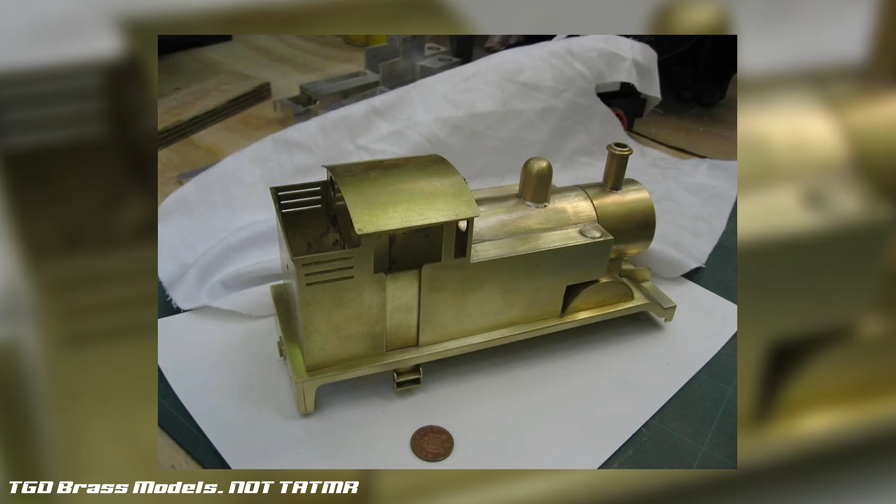I'd never done this before. All my models had been 3D printed beforehand, so I never really knew how to work with brass. And I wanted this video to be special, so I wasn't gonna just do what I normally do. Since the moment I found out that Thomas's brass model was made of brass, I wanted to be able to replicate something just like it. It became my mission to achieve complete brassiness.

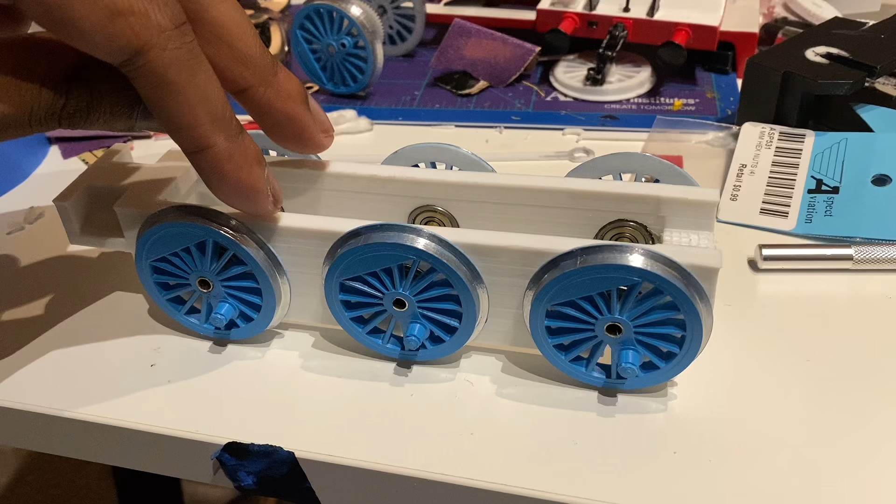But of course I couldn't jump straight into it. I had to get myself familiar with Gauge 1 model making and understanding basics before I could jump into a project so ambitious. So I wasn't gonna rest until I knew exactly what I had to do to make this model happen. Over the course of 2 years and 38 Thomas models, and talking to a ton of people, learning the ins and outs of Gauge 1 modeling, I was able to come up with a pretty decent idea of what I had to do.

Now, this wasn't gonna be easy, nor was it gonna be any form of fast project or something that was gonna be done within the matter of weeks. As I said before, this model took a lot of planning and a lot of just overall brainstorming before I could bring anything into the physical realm and start mangling brass with my bare hands.

Every time I made a Thomas model, every time I improved on something that I did with my original model, and every time I made somebody else's model, I learned more and more things of what I had to do and what not to do when making this model. I had to understand the ins and outs, exactly what to do before I could move on to anything physical.

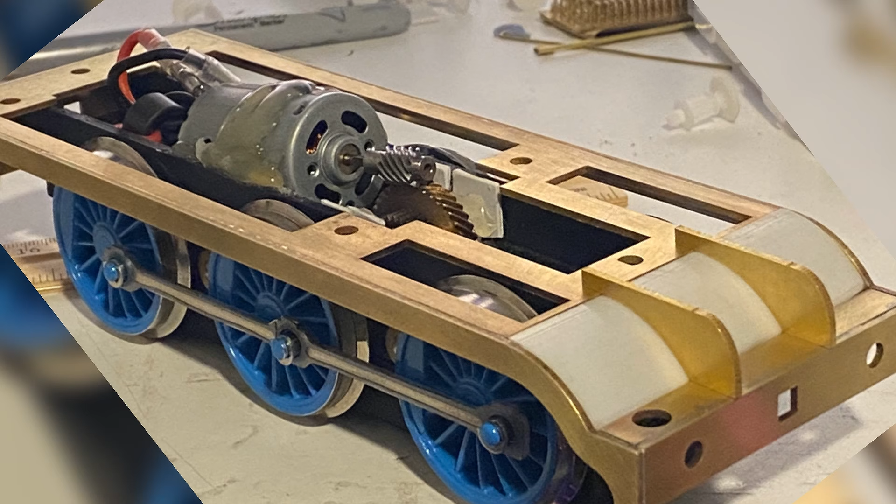So I immediately moved on to the body. The body was, I would say, as equally as difficult as the running board, but it was still an easy task now that I knew what to do specifically. So I started with the side walls and the top of the tanks. During this time, I was also experimenting with smaller brass parts and soldering things together.

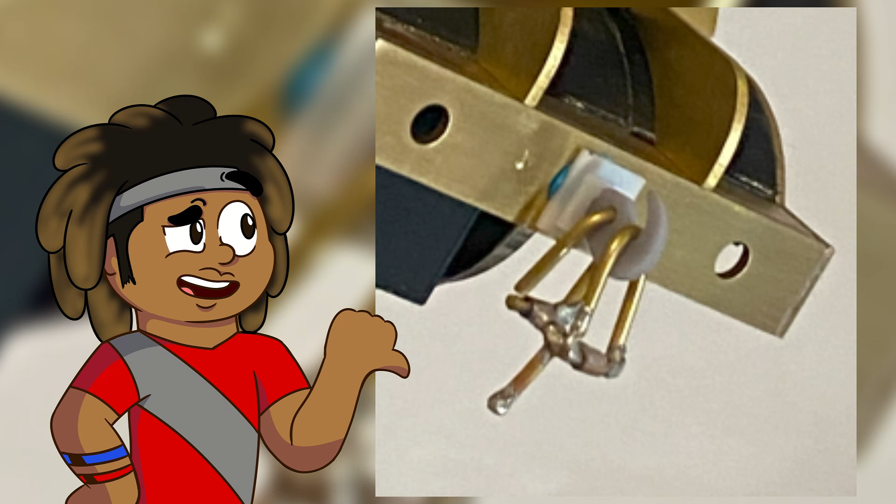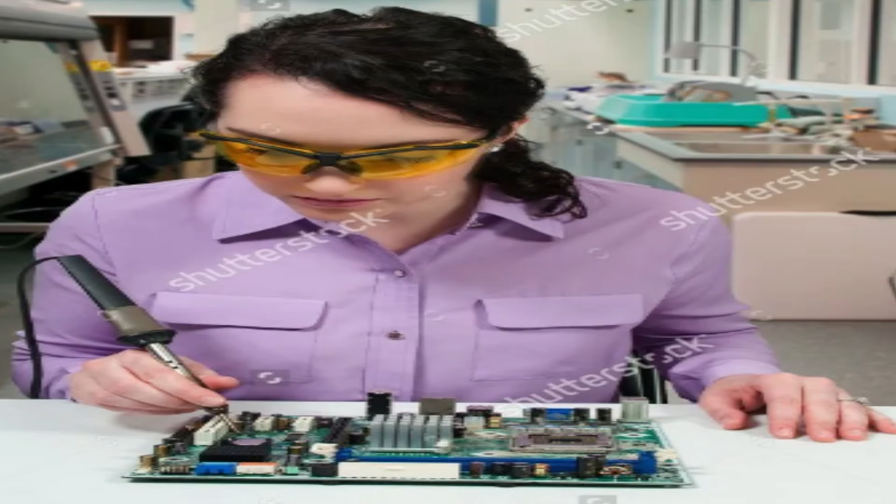I wasn't too sure of exactly where to get Thomas's era coupling hooks from, because I had no idea what they were. I also saw Noah make some scratch-built coupling hooks for his salty replica, so I was like, hell, I can do that too. So I ran down to Hobby Lobby, grabbed a couple of brass rods, went back home, sat down, whipped out the soldering iron, and got to work. In no time, I had some semi-decent looking scratch-built screw-link couplings.

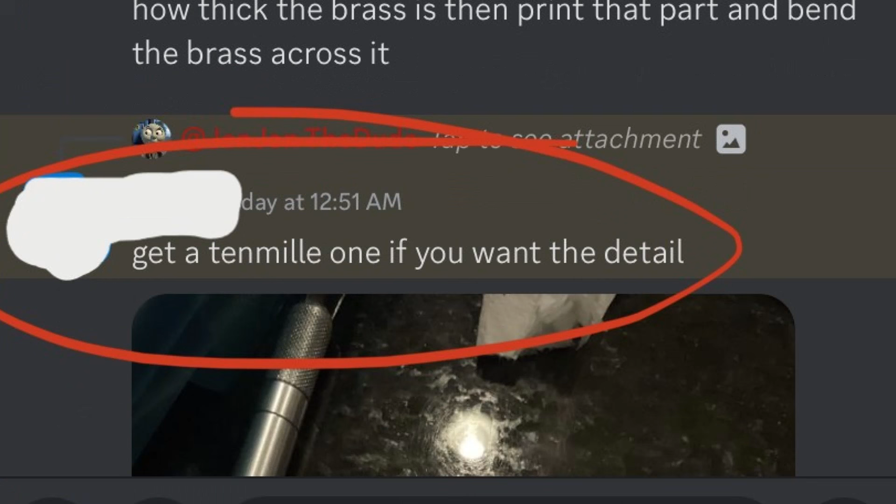After I made the first set, I let the guys know exactly what I was up to, and they didn't approve. They graciously pointed out that the original couplings were Tenmille couplings, which, admittedly, I guess I had to go for the accuracy, so I buckled down, accepted the cyberbullying once more, and got myself two Tenmille screw-link couplings. They were not having it, man. I tried to make handmade couplings because I didn't know about Tenmille ones, and I tried my best. They looked the part. Yeah, whatever.

Who cares about the couplings right now? I'm still in the process of building the body. Let's fast track a little bit here, but I managed to figure out the body and have the main parts soldered together. I had the top of the tanks and the back soldered to both sides of the body, but I didn't have the cab.

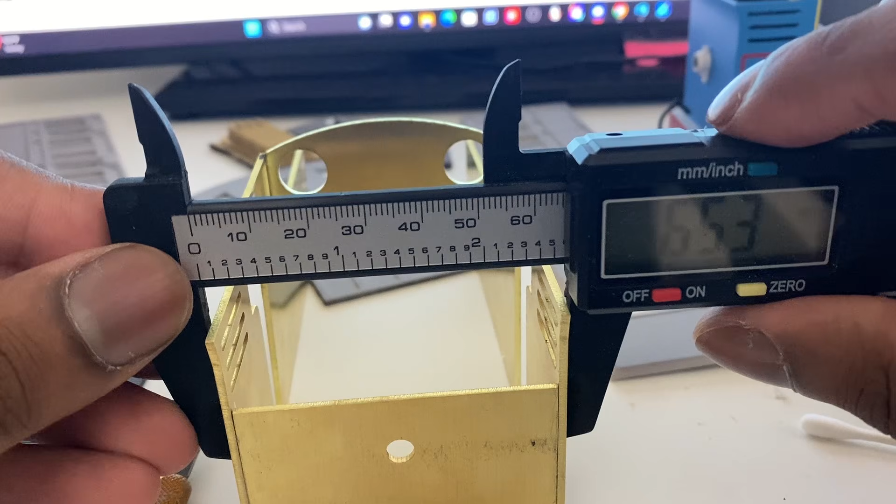Whatever, we can fix this. But I'd have to do that. In the meantime, while I tried to mentally figure out how to fix this issue, I decided to move on because there was absolutely no time to hang around.

So I decided to bust out some of the brass I had and hand cut myself a brass roof. I used brass shears, a PVC pipe, some heat, manhandling gloves, and a heck of a whole lot of pressure.

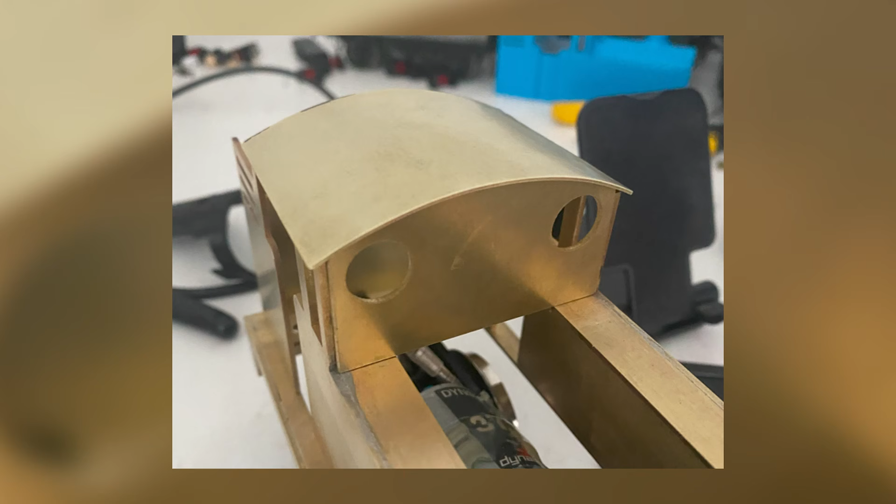Eventually, with some filing around the edges and proper shaping and lining up, I managed to make a brass roof. I understand this is just a curved piece of brass rectangle, but after having to resolder, cut down, chip off, and almost dropping stuff, making the brass roof really gave back hope and the drive forward I needed to get this project done.

Then I used my newly found skills of hand cutting brass and filing it down to make Thomas's brass neck. After that, I used brass tubes of the appropriate size for the dome and funnel. But nothing I had was the right shape for the brass funnel tops and domes, so I just used resin for the time being. I was pretty much fine with this.

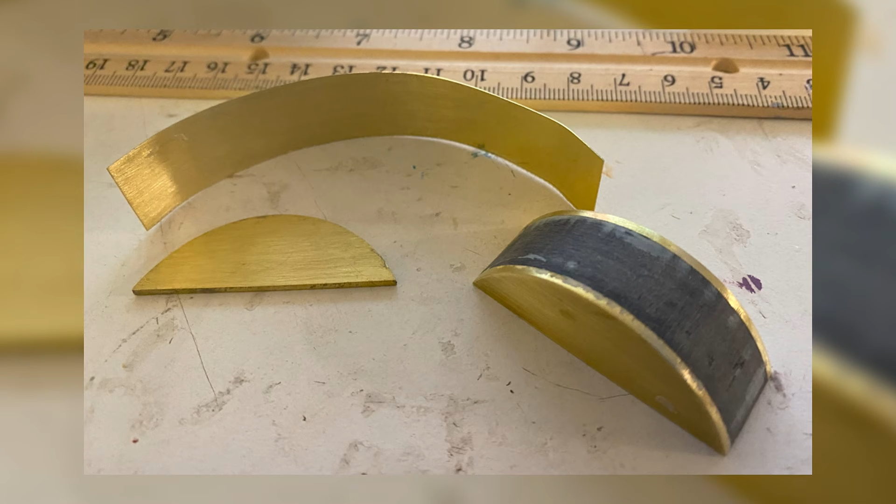I cut more strips of brass for the brass splashers, and those were done. I even gave them little labels. Yeah, they're the same on each side, but I like to have them labeled for some reason. Don't judge me! At this point, Thomas was around 70% brass. I couldn't have been more proud of myself.

I pretty much came to a standstill when it came to Thomas's overall build. I also didn't know how to give him a brass boiler. Then Noah came out from the clouds once more and showed me a site to get this brass boiler, so I did.

It arrived and I immediately got to measuring and cutting and cutting and measuring. Thomas's smoke box, boiler, and running board curve are all made of the same diameter brass tube, so I was able to cut this up into miniature pieces and get things stuck together in no time. The running board was officially the first part of Thomas to be fully made of brass.

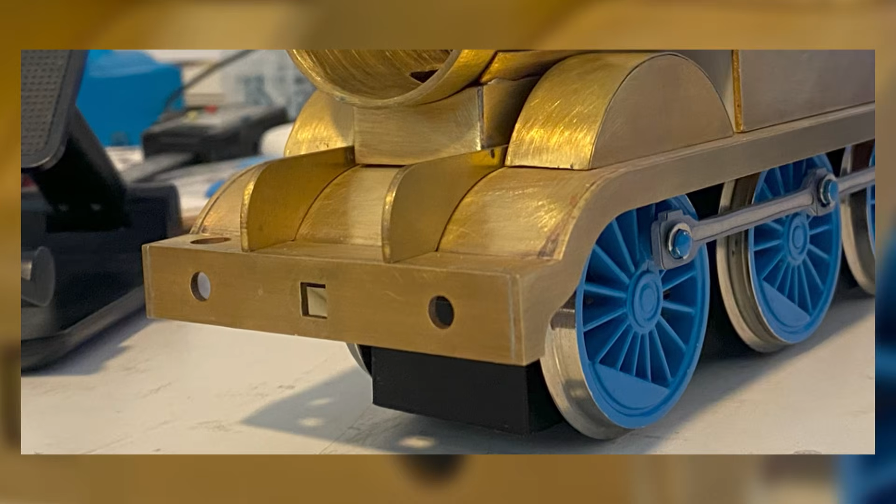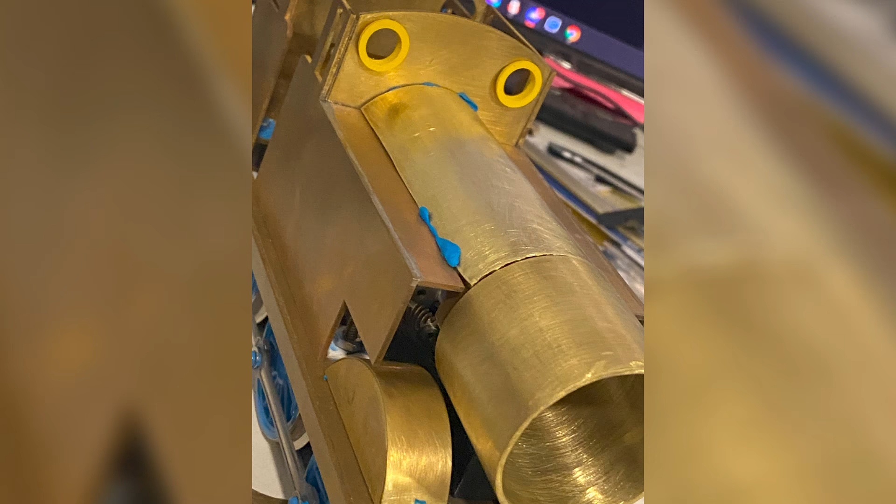After I had the piece of the running board cut and soldered down to have that nice, delicious looking curve, it goes without saying that Tuffy was pretty excited. After test fitting this thing, it was time to really get into action. I had to solder this thing down now.

But before I did, my good buddy Jamos told me about some of the most wonderful tools in the world: helping hands. Helping hands are a pair of clamps, I don't know what metal they're made of, but they're able to position themselves in any way I see fit and hold the hot metal while I solder. At this time I had a smaller torch, so I had a more controlled flame, and this really changed the game.

I then used this to hold the boiler and the cab fronts, getting everything soldered down. This made soldering smaller parts so much easier. The front end of his cabs were pretty much a one-and-done scenario, but then I had to buckle down and do some of the hardest parts I've ever done, such as his bunker curve.

I knew that bending this piece of brass with my bare hands and a couple of pliers wasn't going to do the job, so I asked people, hey, how am I supposed to bend a 0.8mm thick piece of brass? They introduced me to one of the most beautiful tools I've ever used: a vise. A vise allowed me to put the piece of brass I needed and bend it to shape accordingly. It was absolutely a game changer.

So with the power of my vise, my pure man strength, and the helping hands, I was able to make the curve of the brass bunker and solder it into place. Thomas's brass parts were almost fully put together, but the only problem was the dome and the funnel. At this time, Thomas still didn't have his funnel and dome knocked into place.

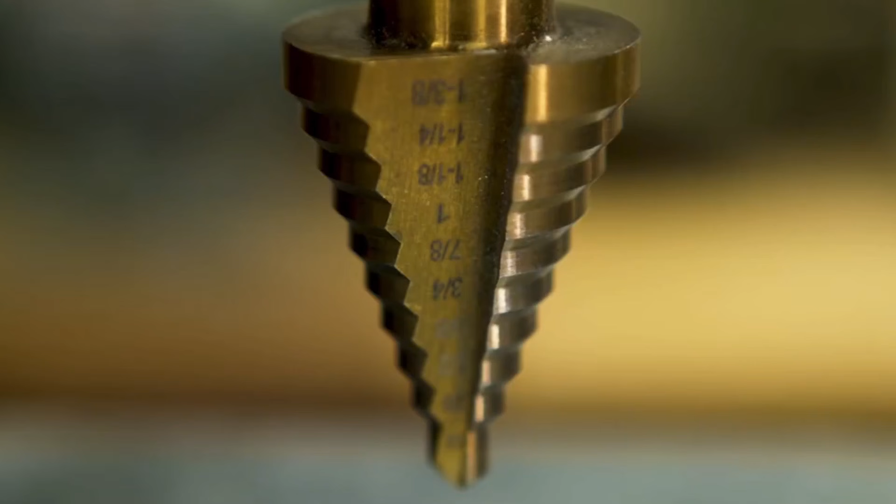I didn't want to limit myself just in case I wanted to add a smoke mechanism to Thomas, so I had to drill a hole into the top part of his smoke box. A step drill allows me to drill into the brass at smaller intervals and eventually get to the diameter size I was hoping to achieve.

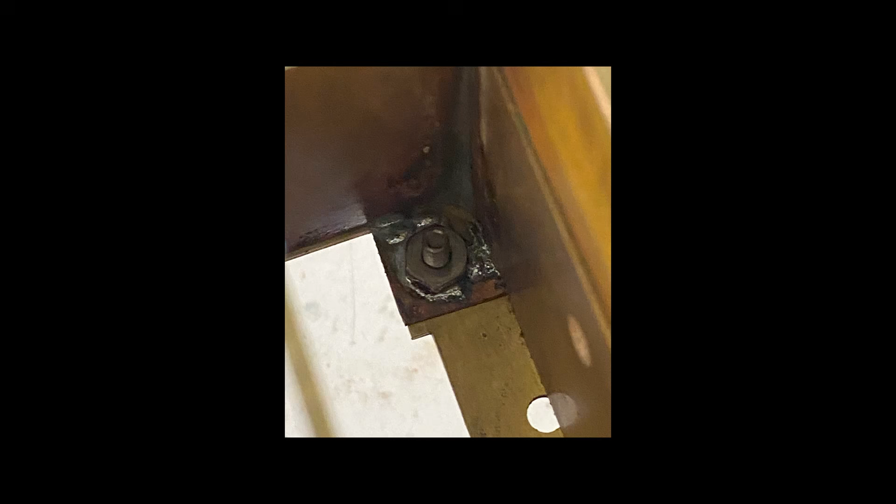After billions more attempts of soldering down his dome and funnel, I managed to get them even and at the right heights. In the meantime, I also soldered down some ways to screw Thomas down to his body on the running board, and we're not going to talk about that part.

I only did 2 of them. Come on, listen, soldering down these screws, it was hard work, okay? I only had time to do 2 because they kept moving, they kept sliding, I couldn't really see inside the body. Come on, you would have done the exact same thing. You would have done the exact same thing!

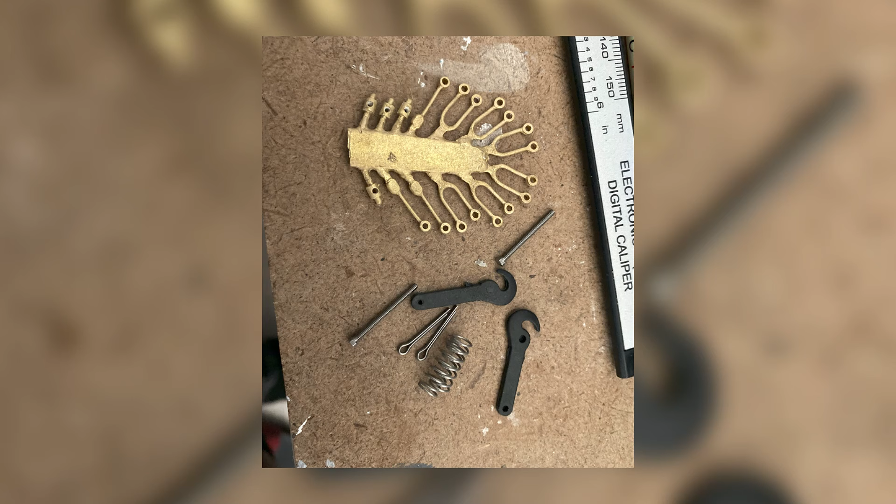Later along down the line, Thomas's Tenmille couplings arrived, and I couldn't wait to put these bad boys together. But my only issue was, I didn't know how. The only other person I've known to put together Tenmille couplings was Thomas Tank Merch, and they told me I had to use something called a metric tap. And of course, the one I needed was so small that the local hardware stores weren't going to have something like that in supply.

So, to make a long story short, I ended up using a little hand drill to open up the parts that are supposed to go together, and I used an X-Acto knife to open up the hook, slip the brass parts in, and close it back up with some super glue. And we've got accuracy on 100, baby!

I forgot to mention this earlier, but I ended up spending a very embarrassing amount of money on brass domes and funnel tops for Thomas instead of using the resin ones you've seen in the images prior, because, again, cyberbullying and peer pressure has taken full effect on the mind, and I've had to succumb to the pressure.

After consulting with a few people, I realized that the brass Thomas, the original model that I'm trying to replicate here, had his smoke box soldered down to the running board, and accuracy as goes is accuracy as goes. I decided to do the same.

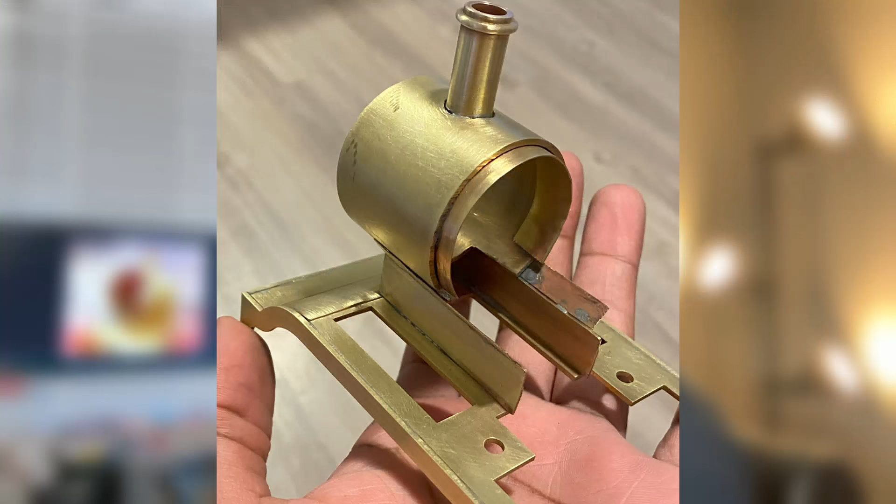At this moment in time, Thomas's body, everything was perfectly put together and made of brass. This was crazy. I was holding a brass Thomas replica in my hands, made by me specifically. This was the greatest feeling I've had for a while. He was cleaned off, he was shiny, he was ready for his little extra bits right before the filling and priming, and it's like nothing could go wrong.

Oh yeah, the chassis. Oh my god, how could I have forgotten about my favorite part of this whole thing...

The process of making the chassis is a battle that I'm still currently fighting today. I feel like there won't be a solid update until way later. But I'm just going to show you and tell you basically what I had to go through.

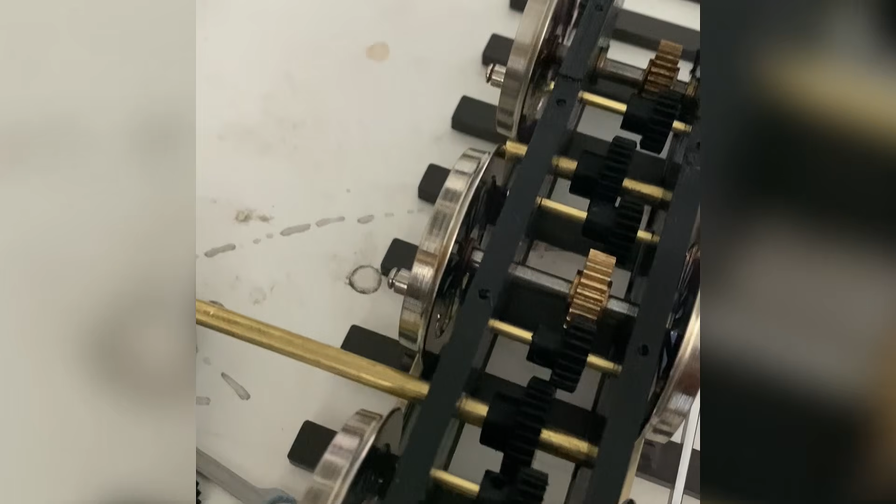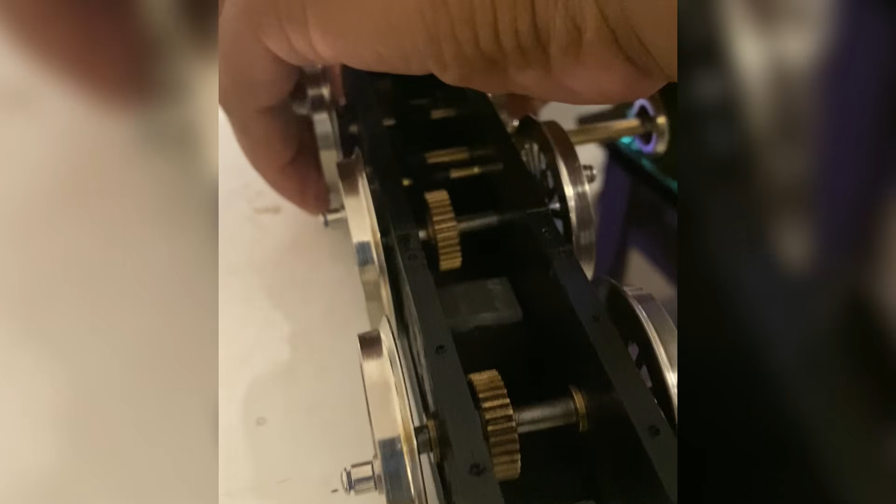The original chassis was a prototype chassis that I built using Jamos's recently constructed CAD files, and this chassis was fully bricked up. This chassis was fully geared up, which did prove to show me a bit of difficulty and really challenged my expertise when it comes to motorizing chassis, and I hate them so much.

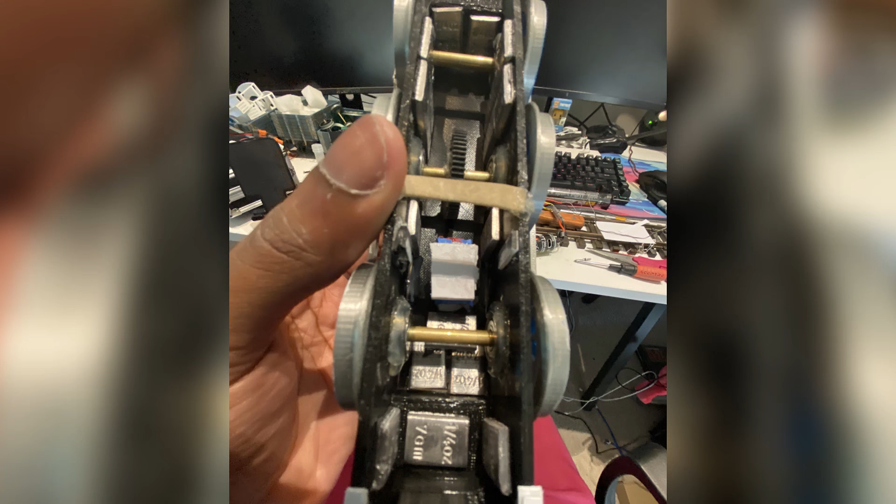I've made 3D printed chassis in the past, and as far as I'm aware, they didn't really turn out that well. They were fragile and shattered pretty much the moment they started moving, but that was way before I knew anything about anything. Seeing Jamos achieve something so great with the chassis she printed for herself, I thought I could do the same.

But my god, was I wrong. I didn't know the next thing when it came to fully geared chassis, much less gear ratios and how they all work. The chassis I 3D printed for myself was too stiff at one point, the gears kept locking up, it didn't roll as freely as Jamos's. I thought that maybe the gears needed a little guidance with some oil, and that didn't work. But after some consulting, I did manage to make the chassis run a little smoother.

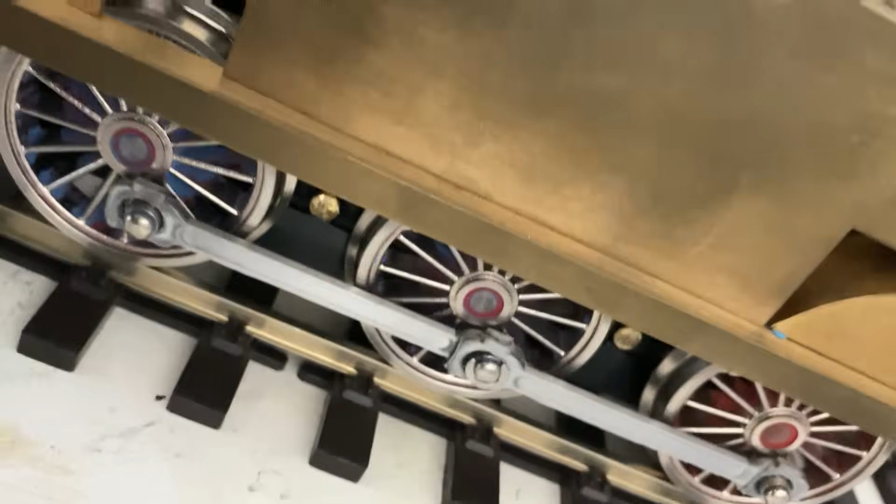It's really late, but like, oh my god. It fucking worked. It fucking worked. Oh my god, it's so good.

The next step was having the motor mounted to the chassis the proper way. Using reference pictures of Stanley's spare chassis owned by Tom's Props, I had the idea to make my chassis pretty much the same as that. That's also when I realized that I have no idea what the hell I'm doing.

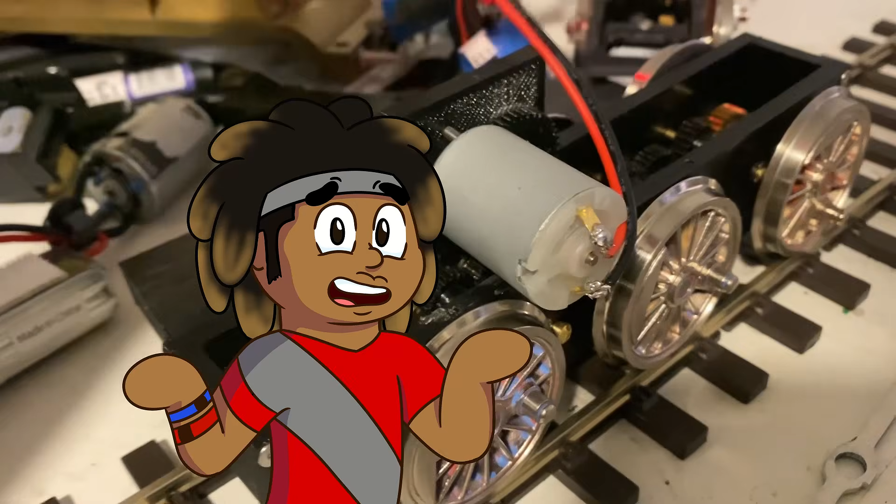So for the time being, I had to scrap that idea and go for the good old classic worm drive. The worm-driven chassis seemed to be the most reliable and the most dependable, but this is exactly what I had to do. I was really excited to have this thing going, but something felt off. Something felt weird about having a 3D printed chassis block and gears alongside a solid brass model of Thomas.

That's when my good friend Goodwin came down from above and slammed this massive chassis block down on my desk from thousands of miles away. I couldn't have been more excited to get this bad boy underneath the Thomas body and get this thing rolling.

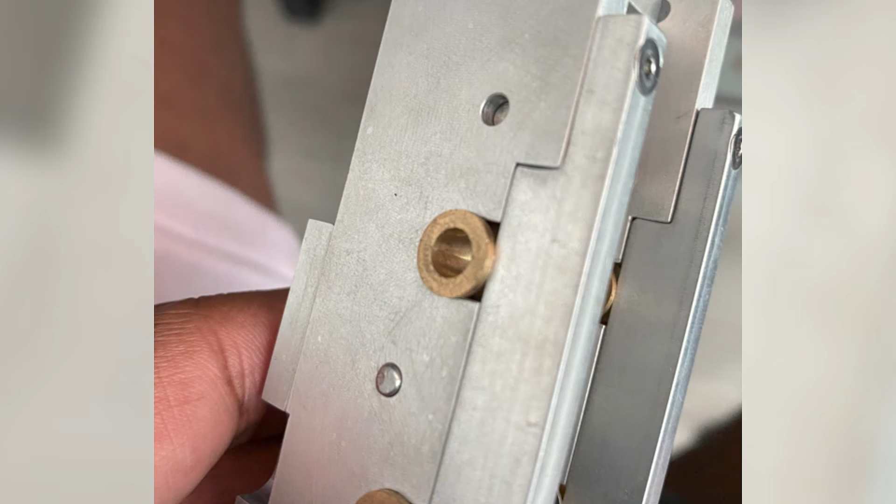I had to take one of the Markland wheels that I had and pop off the wheels on both ends, put on some bearings, and fit it to the chassis. And might I tell you, this chassis ran like a dream. Well, not ran, it was really smooth when you pushed it, because I haven't figured out the motor situation, but we'll get to that.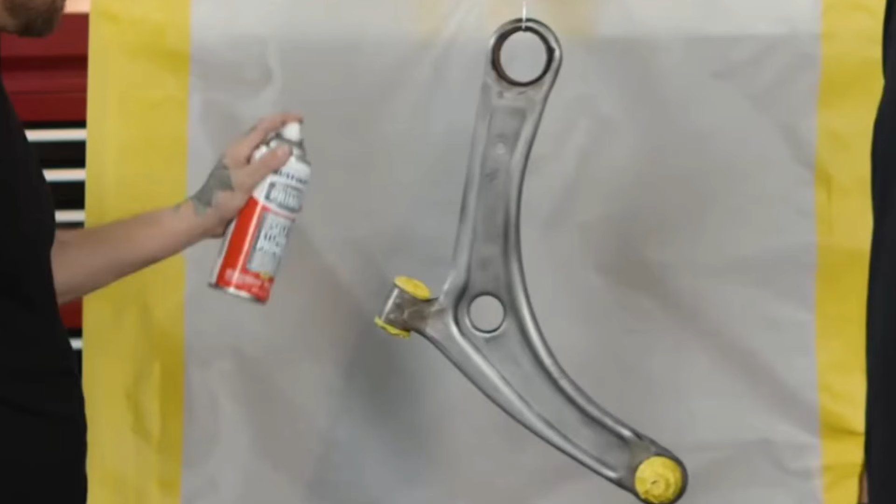Since Thomas is completely made of metal, I had to use something called etching primer. It's basically a primer that allows paint to stick to metal without it flaking off over time. After Thomas was in his military green, I then gave him a pink primer.

After Thomas got his pink primer, the process was gonna be as simple as it comes, you know? A good old-fashioned TS23 and TS10 and call it a day. And that's what I did. Thomas was given the good old 1-2-1-2 and painted blue before I even knew.

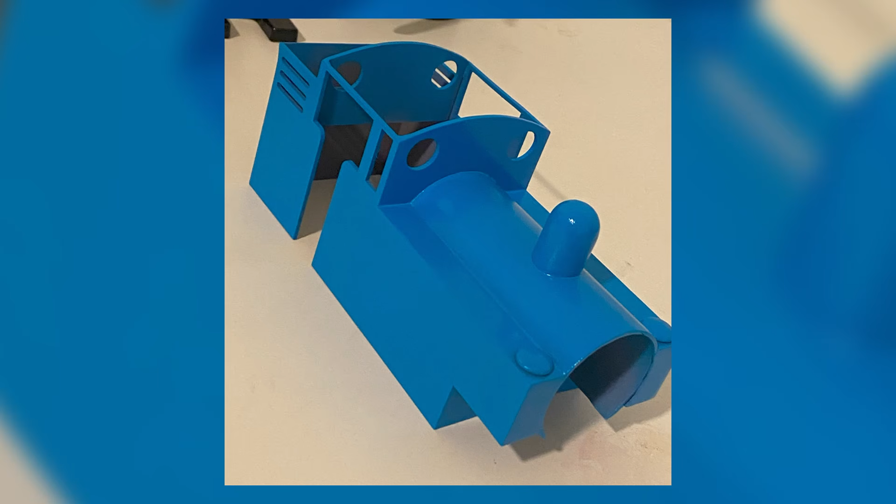The parts after that were then painted black and given a good old finish of matte. What I should have said is that I went ahead and painted the running board red. Although it was first, there wasn't much to say, but I then painted the top a nice stone gray.

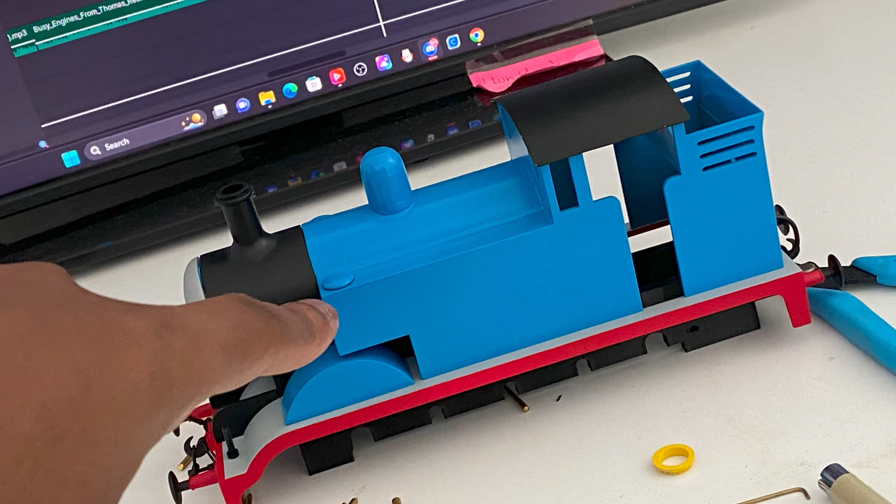Making dry transfers by hand at home is either expensive or impossible, so I had to go back and use vinyl like the good old days. Around this time was the time I was able to pretty much work with the CoolProps Thomas.

Whoa! The color difference between the two was extremely noticeable. After a lot of back and forth and holding the CoolProps Thomas model in person, it really opened my mind to the idea that these models were painted for the idea that they were going to be seen on camera, and not to look good in person.

The blue I've been used to was a lot more vibrant in person, and I guess on camera too, than they should have been. So I ran down to the local paint store and had the blue paint matched, and I had my Thomas model repainted into the accurate colors.

With that being said, the red on the CoolProps model was not very accurate, and it was a little too light. So with digging around and a little bit of help from a few people, I managed to deduce what type of red this was, and it was the same red that's shared by the brand Coca-Cola.

After Thomas's body was repainted with the proper blue, I finished up the lining, gave the body a matte clear, and this model, he was looking delicious at this point.

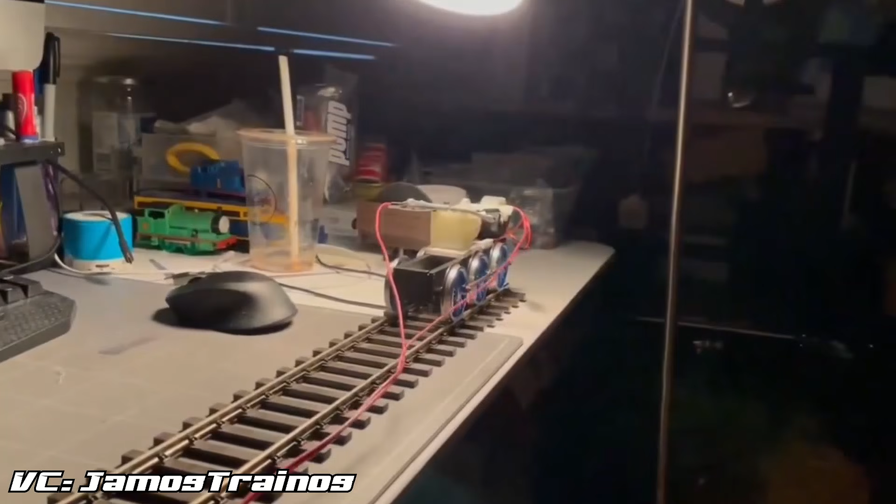Once again, I was back on track of learning new stuff that I have never done before. A smoke mech, I didn't even think was possible for a model this small, but if someone I knew can do it, then I guess I could do it too. And that someone being, of course, Jamos.

Right now, we're cracking new grounds. This is something I've never done before. I've never had to put a smoke mech inside of a model such as Thomas, or at this point, I've never had to work with a smoke mech at all.

The thing about a smoke mech is that I needed some way of pumping air into the smoke mech to get the smoke out through a tube and out of the funnel. And of course, the most classic way of doing this was gonna have to be a pump that pushes the smoke out of the unit.

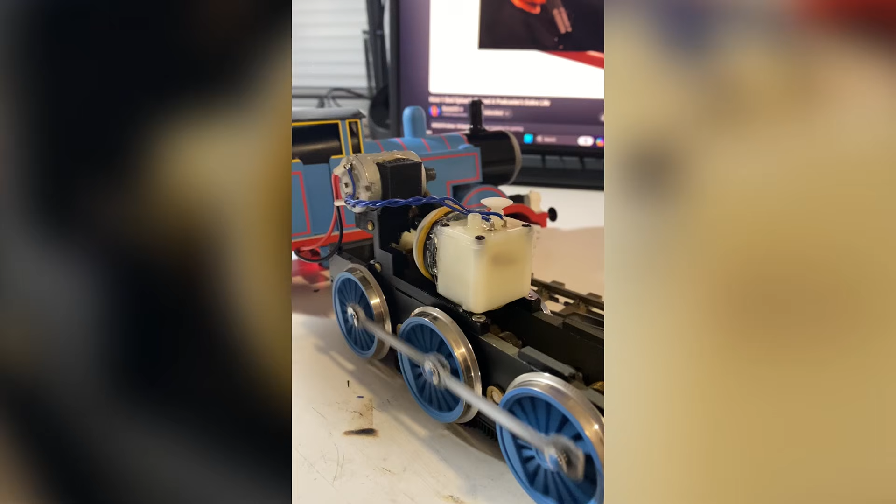That meant I had to find a way to motorize this chassis with a direct drive and have enough space inside of Thomas's body for the battery, the receiver, the smoke mech, and the gears to stick on top of the chassis rather than having the motor inside of the chassis block.

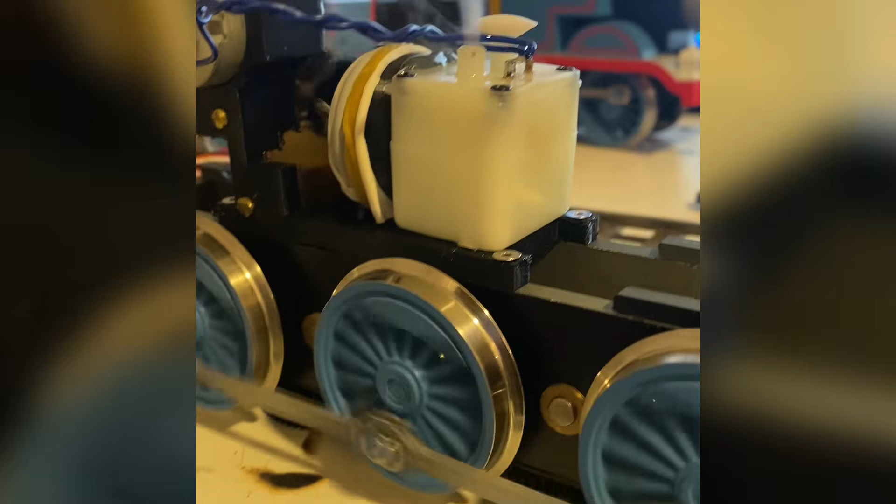In order to do this, I had to have a gear with an arm that would move back and forth as the chassis was going, and that gear would have to be connected to the direct drive, and that arm had to be connected to a balloon at the back of the smoke unit that would push the balloon back and forth, which would then in turn blow air into the unit and smoke out of the tube and out the top of the funnel, creating the effect of a steam engine exerting smoke.

If I explained every little detail about motor torque and gear ratios, I'd be here all day and this video would be 4.5 hours long. But I'm not going to do that.

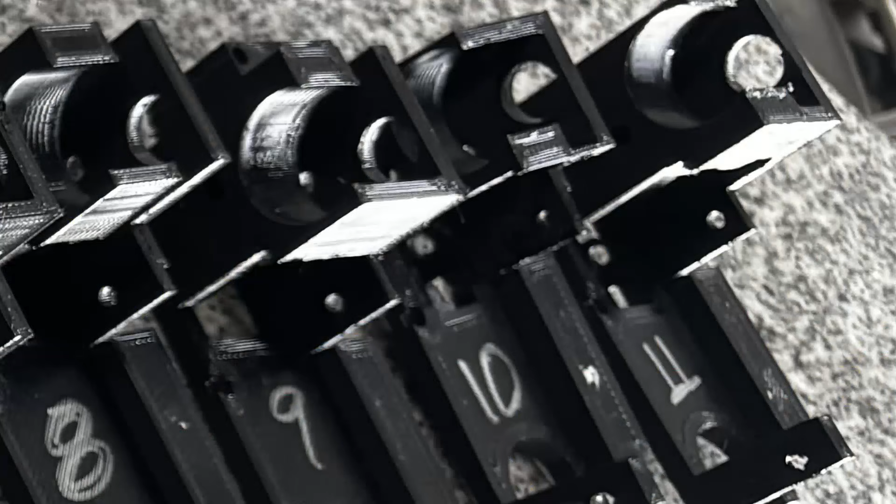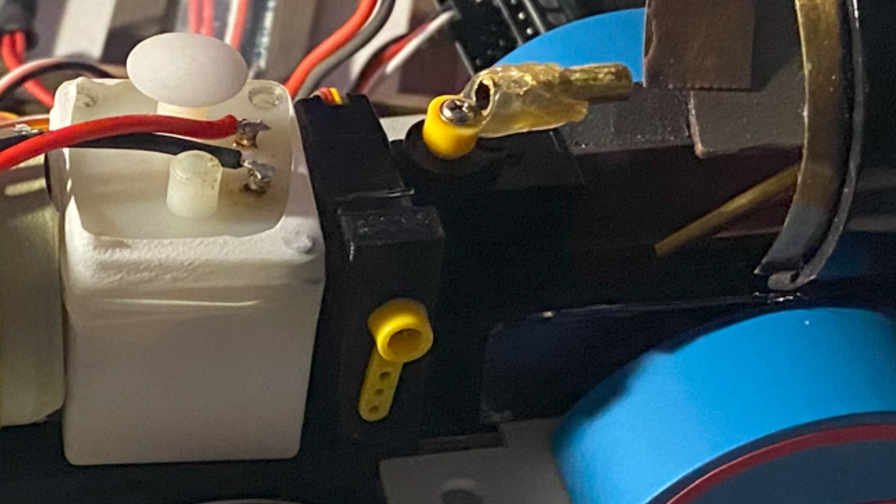I had to go through about 20 different gearboxes I made to accommodate the motor gears, the motor, and the smoke mech, and to have the servos mounted to the chassis rather than the side of the body, to be more accurate, since the best way to maintain Thomas would be to just remove the body instead of taking the body off the chassis.

The original 9-gram servos were a bit too big for what I was going for, but the smaller servos, I believe these are 4.2 grams, fit perfectly mounted to the arm of the unit I created, and I also upgraded how the eye mech works.

It's a lot more accurate to the show now, with this weird catheter silicone tube on the back end of the eye bracket and on the arm that attaches to the servo, so it allows for a more open, free range of movement.

No part of me really wants to get into the gear ratios, torques and motors for specifically how the chassis works, because I'm still learning how to do that myself, and the last thing I want to do is toss out information that's pretty wrong. The way I'm doing it works for me, but I couldn't say it would work for anybody else.

There were multiple different plans to give power to the smoke mech, and only one ended up working so far. The original plan was to have the wires from the smoke mech draw power directly from the motor rather than having its own power source.

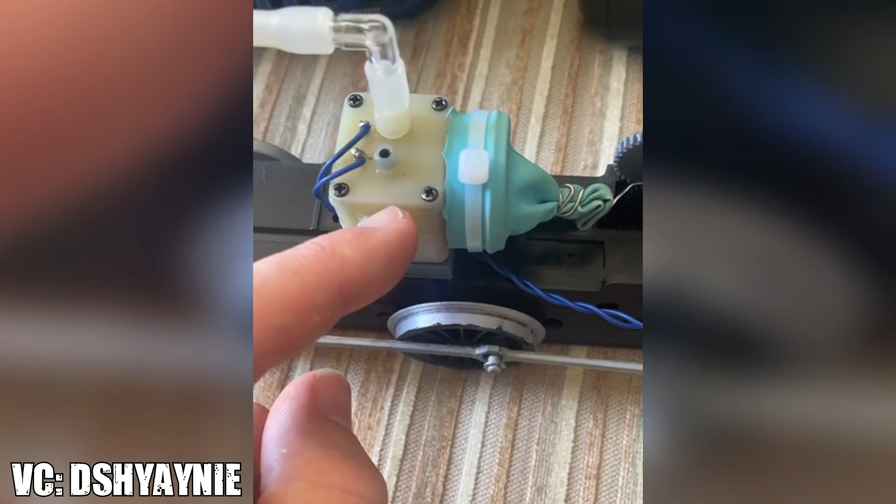The only issue was that I'd have to essentially warm up the smoke mech before using it by running Thomas around a little bit, since the motor wouldn't be supplying power to the smoke mech at all times. So instead of getting a good plume of smoke through the funnel on startup, I'd have to warm him up by running the motor first.

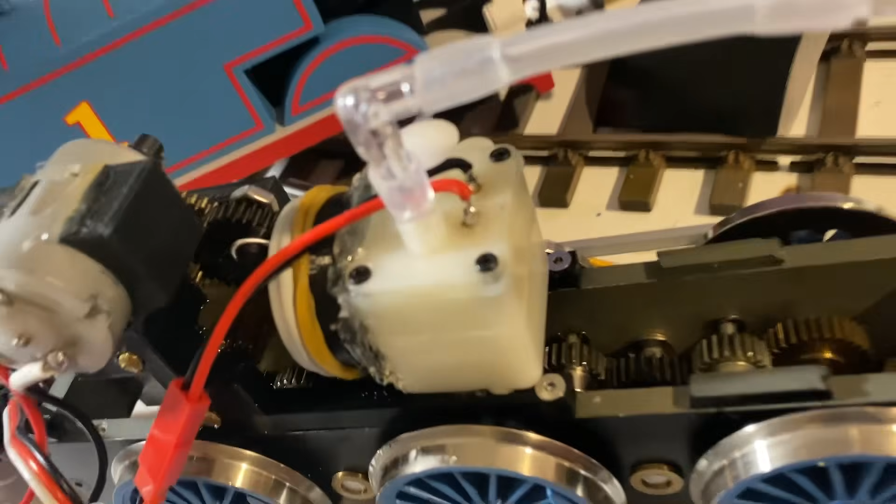The second method, which hasn't worked in the slightest, was to draw power from the receiver and have an on-off switch attached between them. The receiver is connected to channel 6 of this controller, so when I turn it on and off, it gives power to that and allows it to smoke independently, receiving power without the motor giving it power.

So I can run the motor and not worry about that, but when I turn this on, now it's receiving power, the switch is on, give it a couple seconds to warm up. Let's see if I can get this whole shot. Just listen.

It's making power. Making smoke. Getting power. It's fine. This is exactly what I'm trying to achieve. Until...

Now it's doing that. The problem there is that I would have a 7.4 volt battery constantly streaming into the smoke mech instead of the recommended 6 volts. I could just use a 6 volt battery altogether, but I wouldn't have a lot of milliamps, so it wouldn't be able to power everything else like the motor and the eye mech.

I'm running an RC here, people. And the third option, which so far is the best one, is giving the smoke mech its own battery.